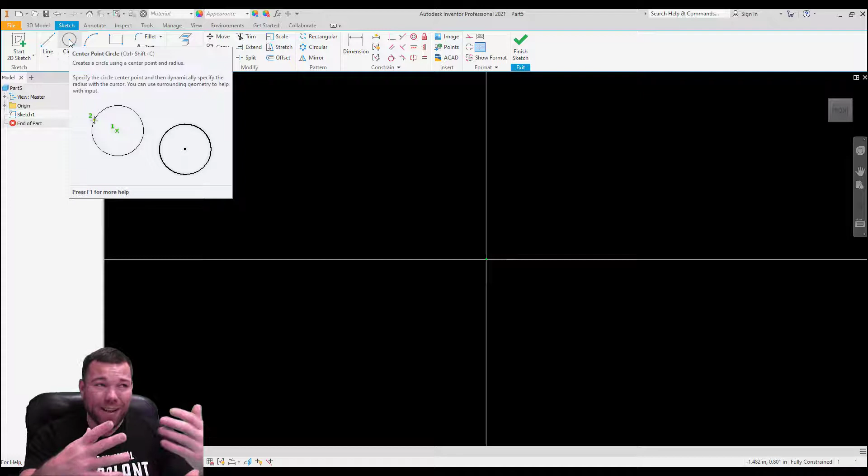I could extrude the shape from either the front, the side face, or the end face. So I can either extrude the end, or I could extrude the front. In this case, I'm going to extrude the end, and one's not wrong or right here, I'm just looking at what I think is probably the easiest.

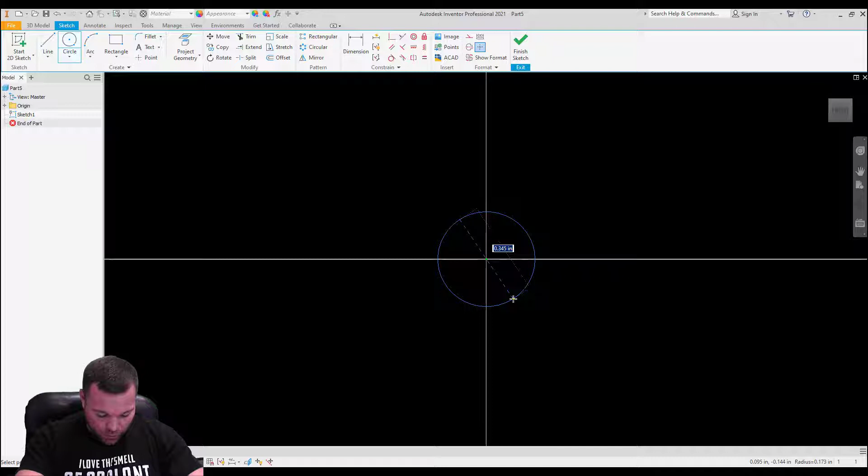So I'm going to extrude from the end face. I'm going to create a circle, and its center is going to be at 0,0 here. And it looks like that is a 1-inch radius, so that's going to be a 2-inch circle.

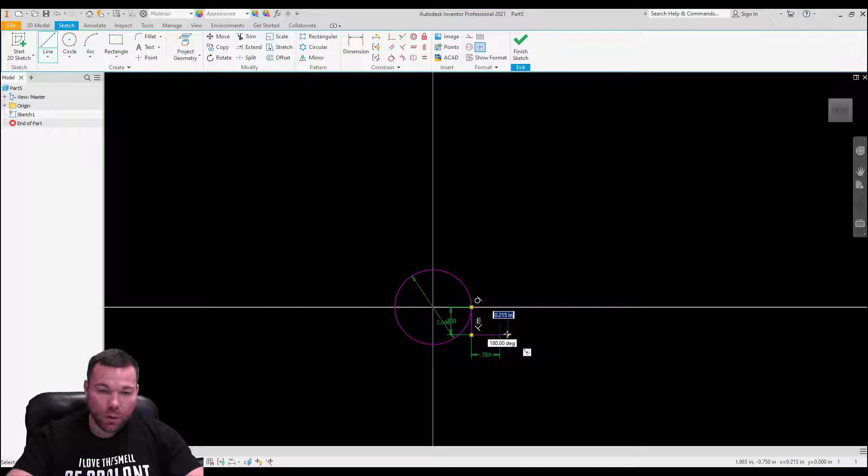Next I need to draw this to 0.75. And it looks like the width of this is 0.75 as well. And it's going to extend 1.5.

Notice I'm typing in my dimensions as I'm going here, which I generally don't do. I generally draw most of it, but since this is more complex, I want to kind of keep control and keep track of what I'm doing. So that's the reason I'm doing that.

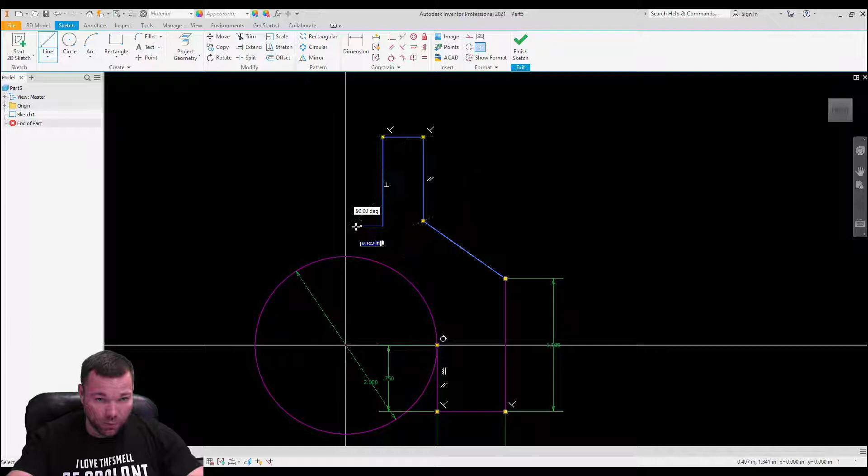All right, so the next thing I'm going to do is just draw the rest of these lines. It's going to be something kind of like this, I guess. All right, so it's not exactly what we want, but you get the basic idea.

So we're going to dimension this, and this is going to be 3.5. And I believe this dimension is 1.25, which pretty much sets this value here. It doesn't completely set that angle, we still have to dimension it, but we have 1 3/4 divided by 2, which is going to be the dimension from here to here, which is going to be 0.5 plus 0.375, which is going to be 0.875.

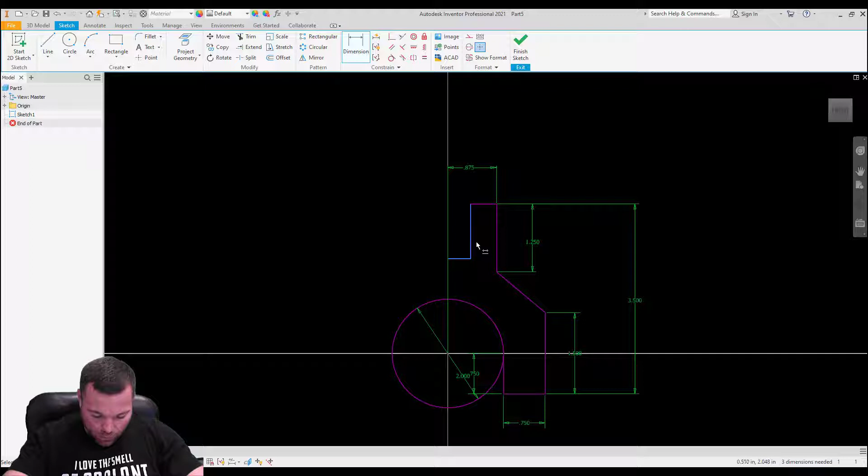All right, so that sets that, and the width of this is 0.75. Oops, didn't mean to click. Oh, that's why, I'm clicking on a dimension. I've got to click on the 0, and this is going to be 0.375.

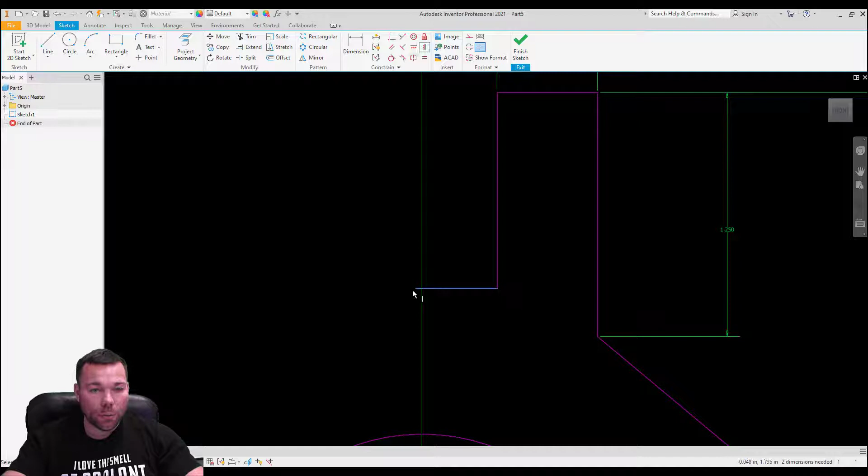And this here, I'm going to put the end of that line in alignment with my 0,0. Now the only thing I need is the depth of this, and it looks like that's 1.25 as well, so that is in line with this.

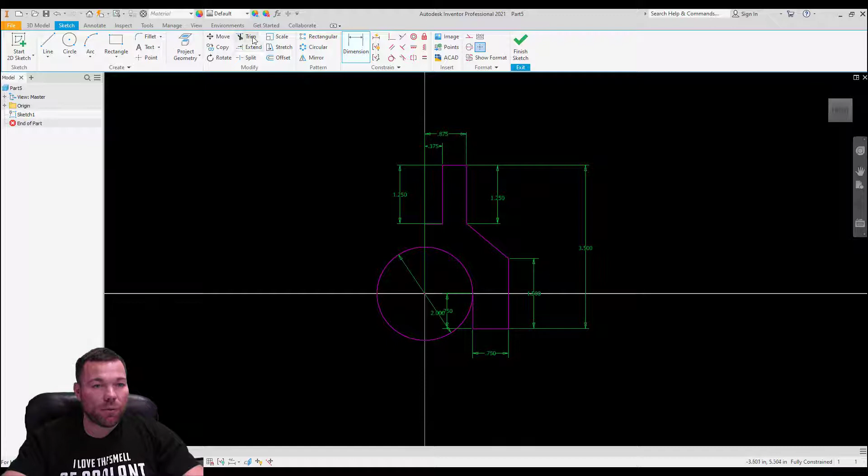All right, so it is fully constrained at the moment. Now, that being said, I'm about to ruin that because I'm going to trim this circle. I did not connect this, I do not need to connect this.

I am going to connect that and I'm going to trim it. All right, so we're still fully constrained since I trimmed that.

All right, the next thing I'm going to do is I'm going to mirror this. So to mirror this, I need a line to mirror over, and I'm just going to use this line since I have one there. The other thing I could have done is I could have just made this construction geometry.

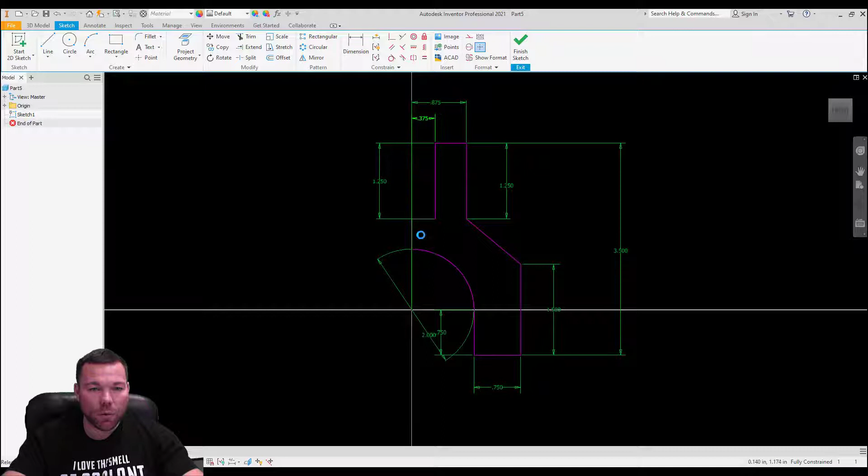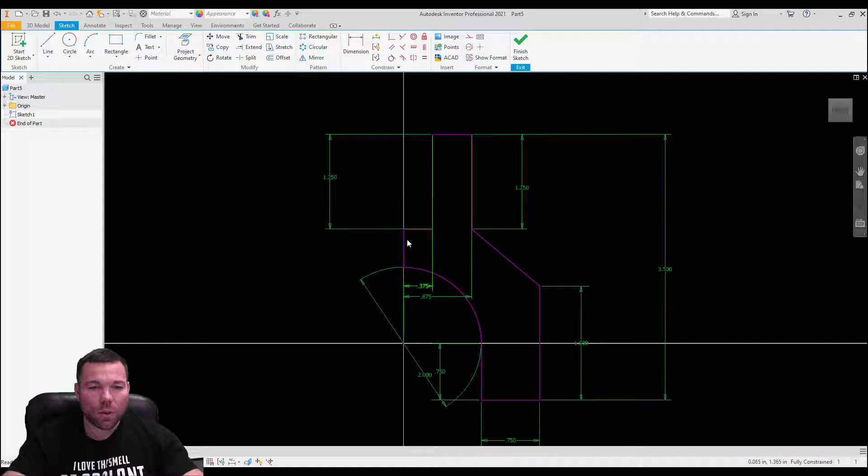What's the difference? Well, let me pull this dimension down, and let me pull this one over so I can click that line, let me change that to construction. Whoops, I didn't want to change that one, just realized I want to change this one. So I'm going to click on that, and I'm going to click construction.

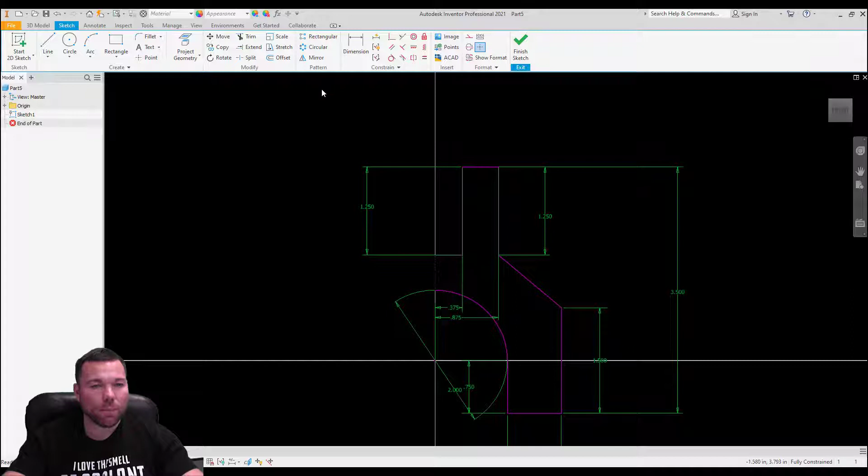All right, and now we're going to go to mirror and select mirror, so I'm going to select all of this. I'm going to unselect that though. Darn it, unselect. There we go, okay, so, select, you can't just unselect it, you have to hold Shift and unselect it. So just FYI.

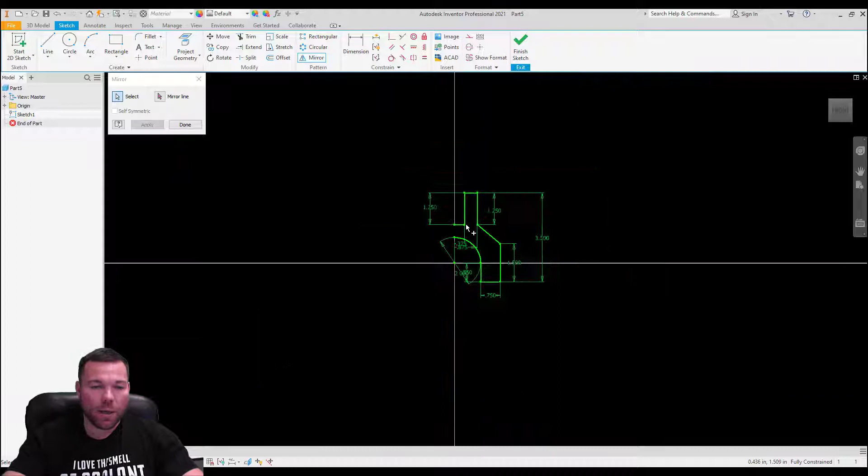Going through all of these different software platforms, sometimes I forget the rules between some of them. All right, so I'm going to select that, and I'm going to hit apply. And there is my drawing.

Okay, so I'm going to hit done, and it's still fully constrained because everything is constrained on one side, and it knows that you're mirroring it over that line, so everything has to be constrained on the other side by definition. All right, so since we're fully constrained, we can go ahead and extrude this.

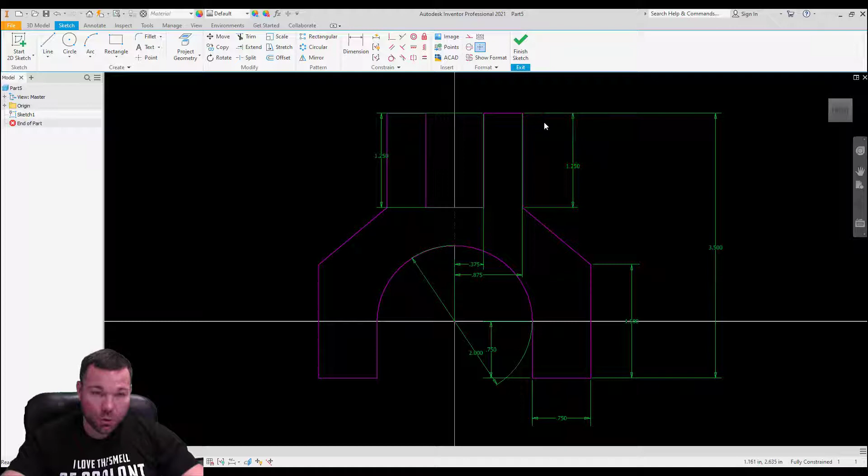So I'm going to hit finish, and I'm going to pick an extrude. Now, the difference between using construction geometry and regular geometry is that these would be two separate extrusions, and I'd have to pick both sides. Since it is construction geometry, it doesn't see that divider in the middle, it doesn't see that as geometry when it goes to extrude it.

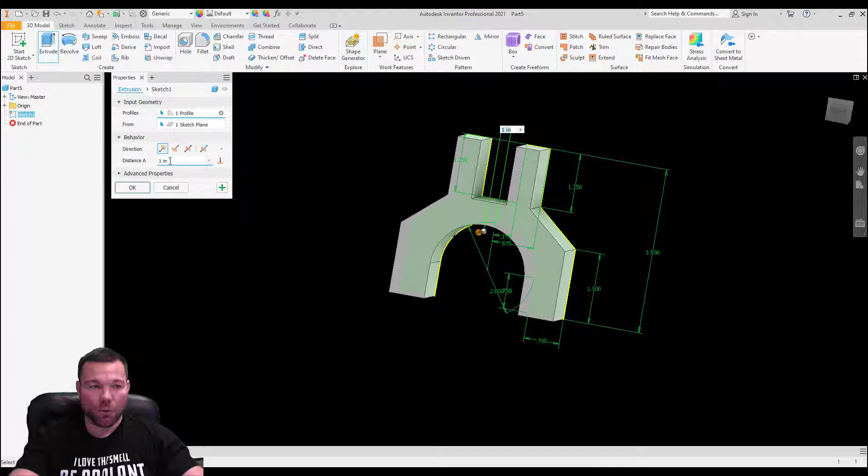All right, so our distance is 5.0, and I am going to do this as a mid-plane, as I always do.

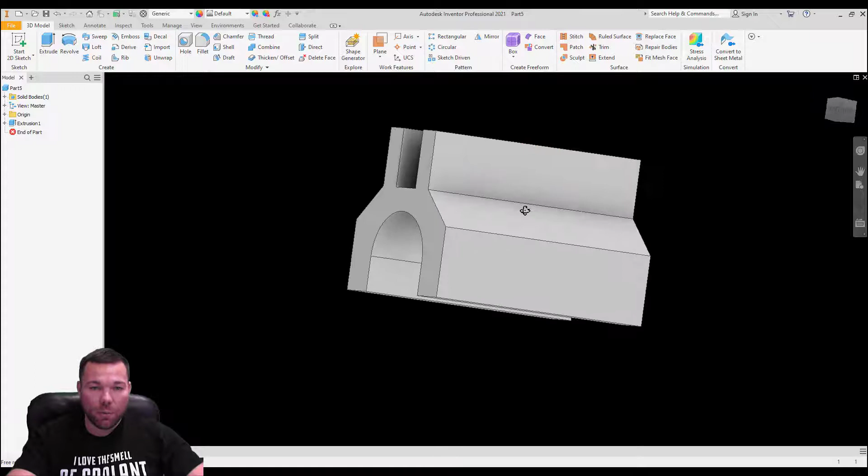And there is our base extrude. Okay, so we have everything we can do on this surface, or this face, done. So now we're going to move on to this face. I'm going to create this on the back, or the furthest most face, in this view.

Okay, so the first thing we're going to do is create a cut out here. I'm going to create a rectangle, and just draw a basic rectangle.

I know that this is 0.75. I believe this one is 0.75 as well. It's safe to assume that that's 0.75, though it doesn't actually tell you. The top little notch sticking up is 1 inch, but it appears to me that that's 0.75, and that notch is actually a little bit longer. So we're going to make this 0.75.

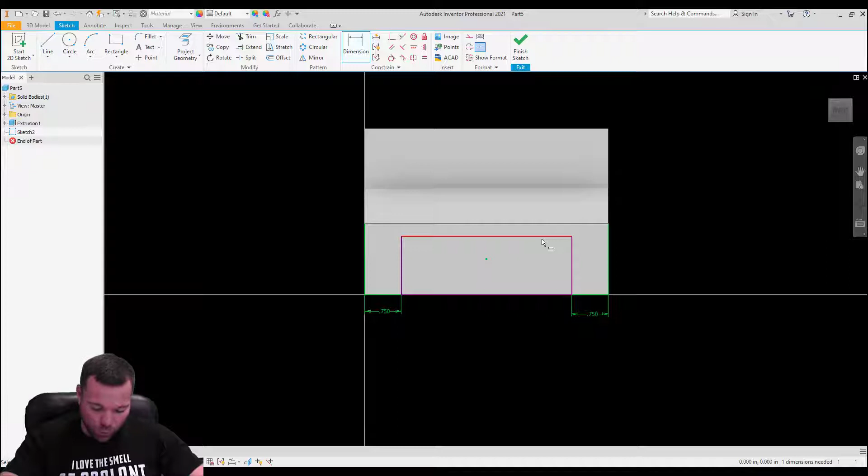And the height of this is going to be 3.5 minus 1.25, so we end up with 2.25. That looks exactly right, right there on that edge. Okay, we are fully constrained there.

That's good, but we're not done. We can do a lot more on this face, so I'm going to stay here. That takes care of that. Now we have a cutout up here that we need to add, and a hole as well. So the first thing I'm going to do is create that hole.

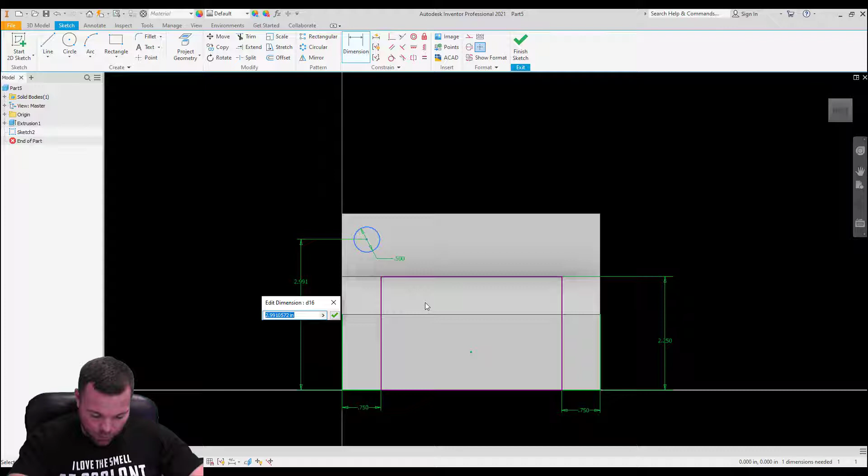That looks like it's a 0.5 hole, dimensioned from here to there. And the center of that hole is 3.5. All right, next.

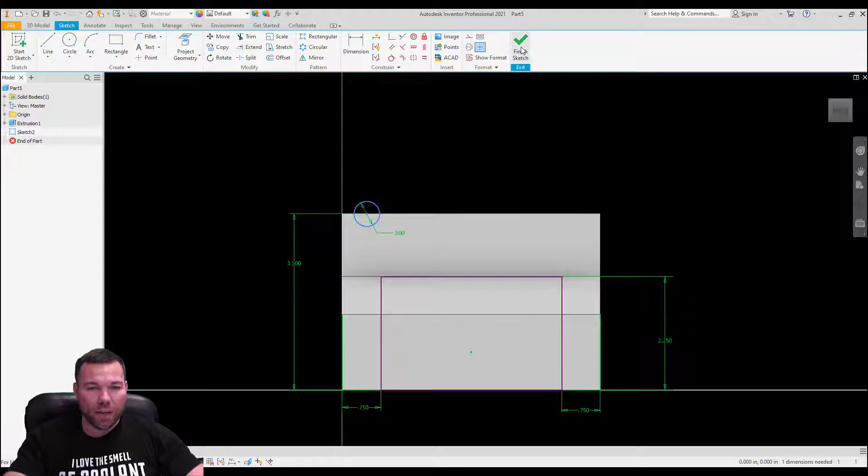Oh, you know what? I made a mistake. So this is an example why I do these in real time. We're going to exit this sketch, go back and change something. What's cool about this is even though I forgot to do something, I can still go back and change it, so it's not a big deal.

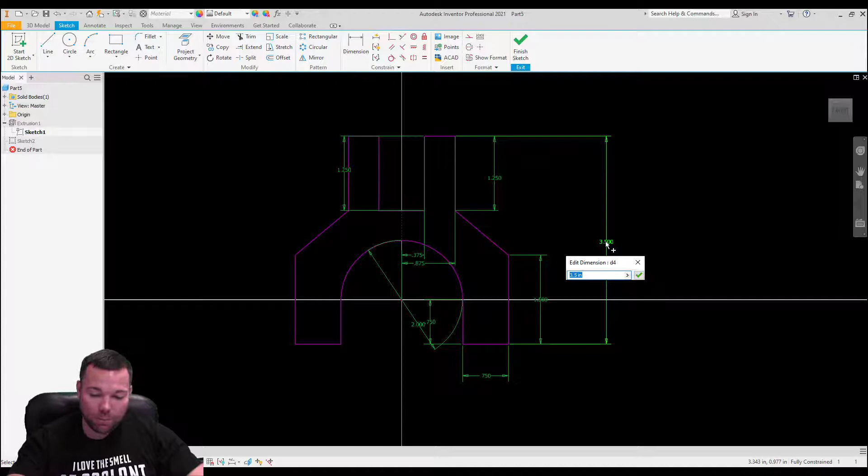So I'm going to go back to my extrusion, my sketch, and change this. I'm going to add the half-inch radius where that part sticks higher. So we're going to make that a 4.0.

And we're going to make this a 1.75, and this is going to be a 1.75. That looks pretty good. We're going to hit finish. And there we go.

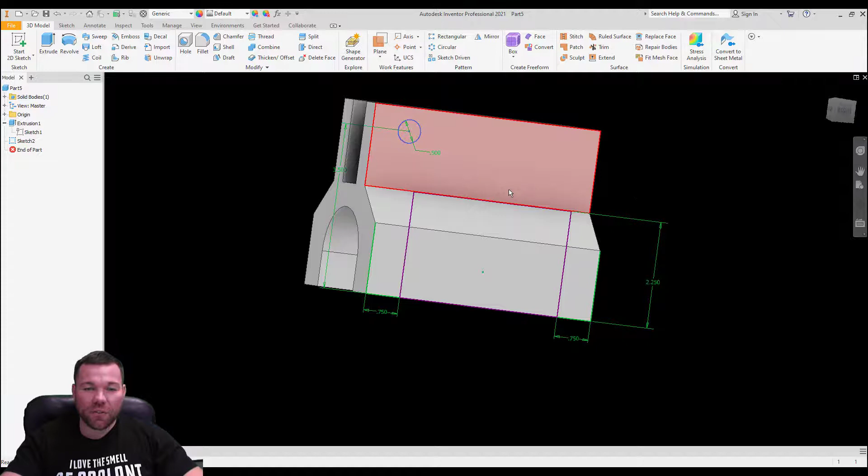So now that we've extended that, we can go back to our sketch, this one here, and first off, let me constrain this first hole. It looks like that is a half inch in from the edge.

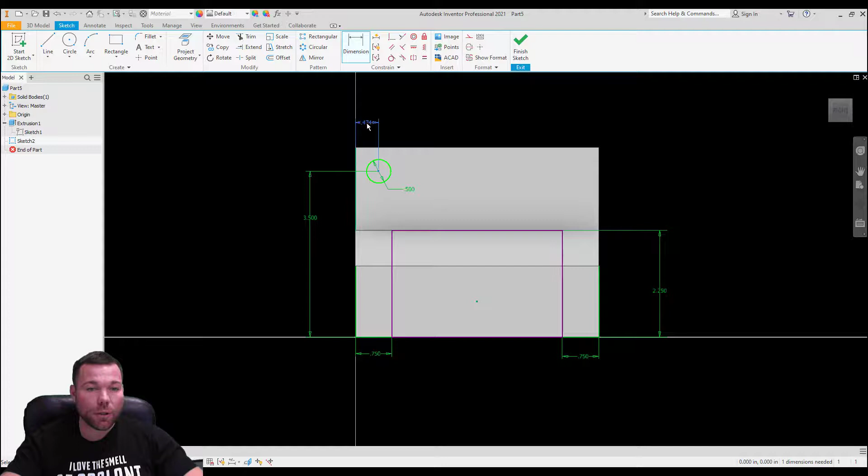0.5, enter. I am also going to draw my arc there. Okay, so that looks good. This here, oops, go straight line. So I'm going to go a straight line from here. Actually, check that, that's not where it goes.

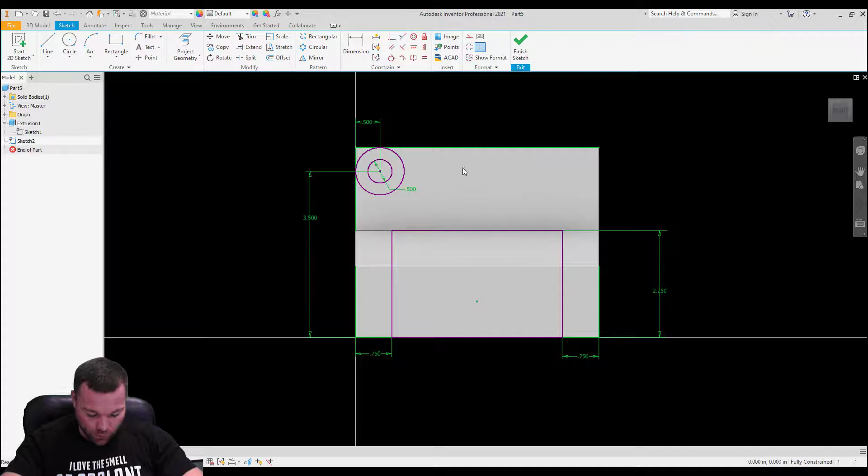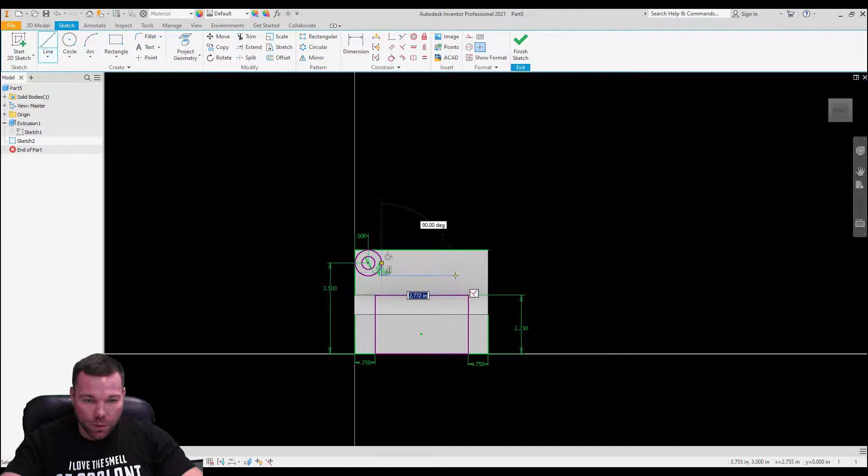I am going to create a straight line from here, though, so I can trim this. And then straight line down. It would appear that that is 0.5. I'm going to draw over, up, over. So this is going to be 0.5. I already got that right. 1.0.

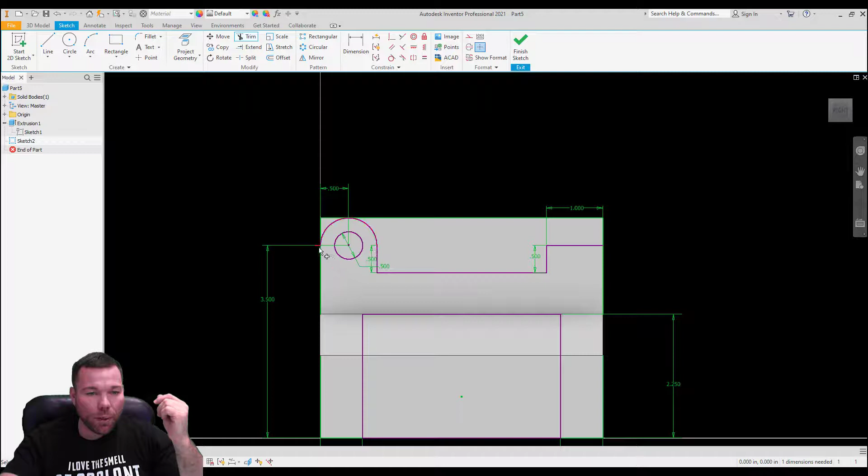Okay, so it looks like I need one dimension yet, and I do need to trim something here. I think I know where that one dimension is, I think it's this line here. So it's fully constrained. All right, let's see if we can extrude this, or we need to connect this.

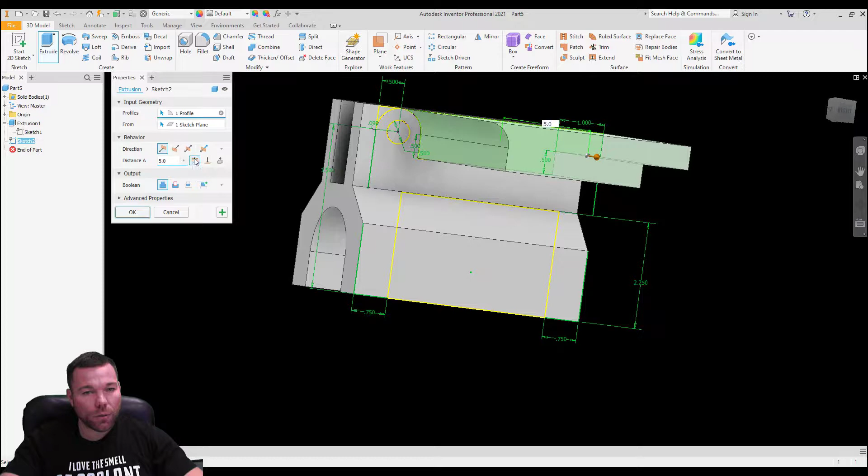Finish. And let's extrude. Through all. Reverse that. Oh, need that one too. And we need to do a cut. And that one's a cut. And let's not forget about the hole.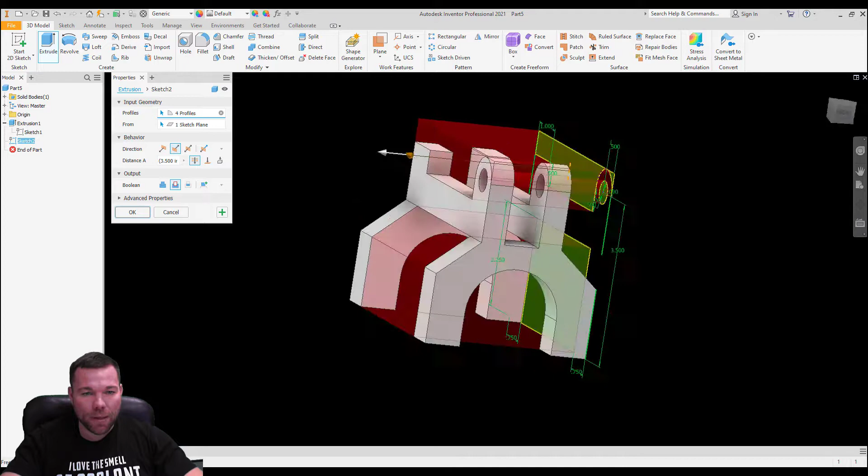All right, so that looks like everything we need. I'm going to go ahead and hit OK. And there is our part. So we were able to do this in 2 operations, 2 features, and create this. It's just thinking about how you can do it in as few steps as possible, while also keeping that design intent.

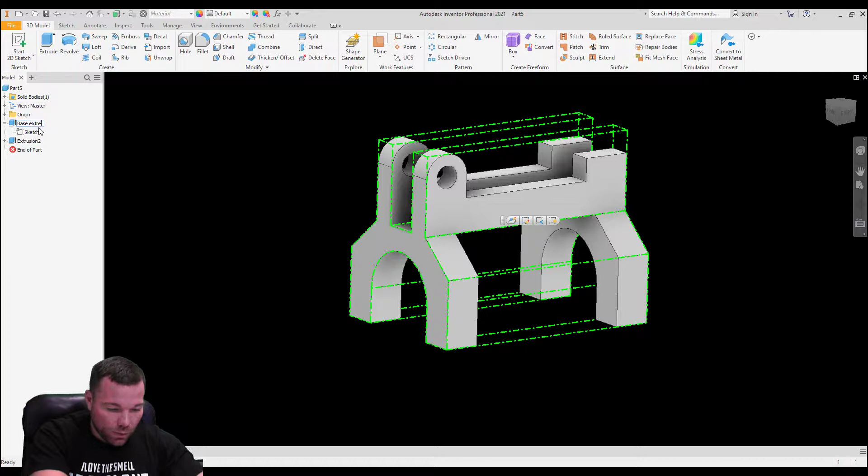The good thing about this is, I need to name this base extrude. I'm going to call this side cut.

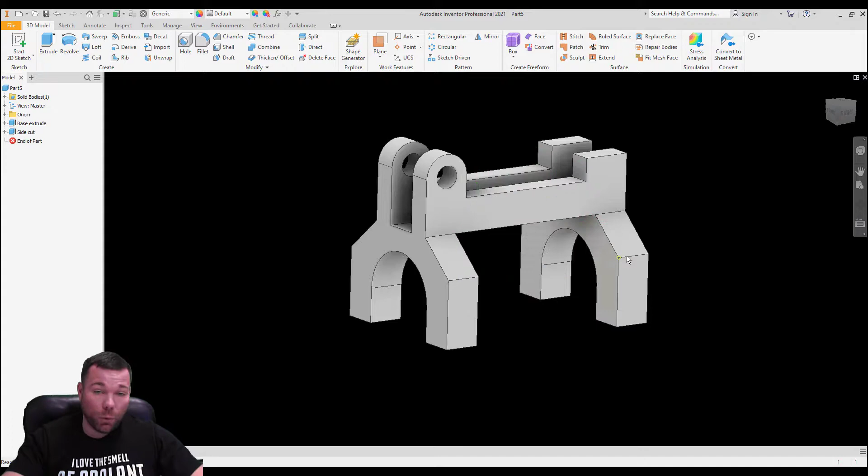The good thing about this is I can go back to these and change just about any feature just by going into these sketches. I can change pretty much all of the shapes that I need to change if I were to need to. But there we go, everything looks good and our sketch is finished.

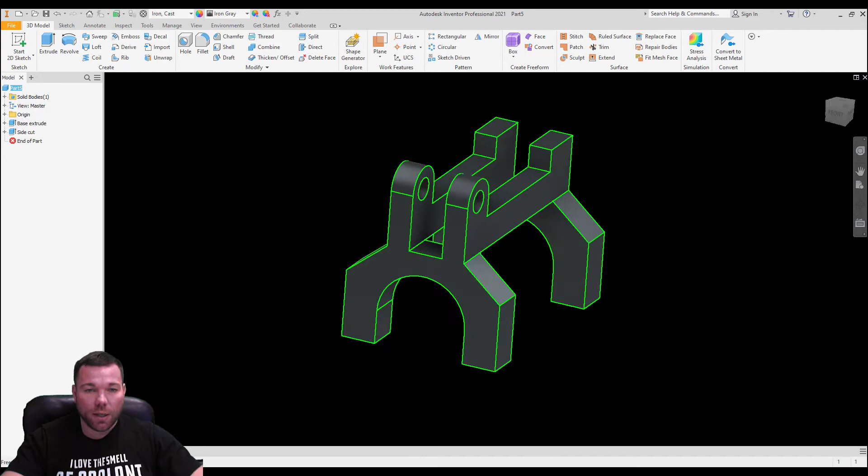Now, the last thing we need to do is go into properties, and it's saying that this is made out of cast iron. So we're going to select our cast iron, apply, close. And there we go, that is our finished part.